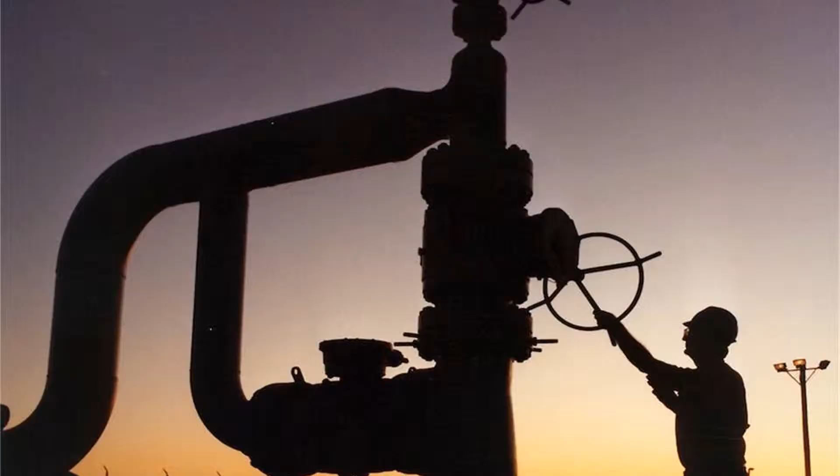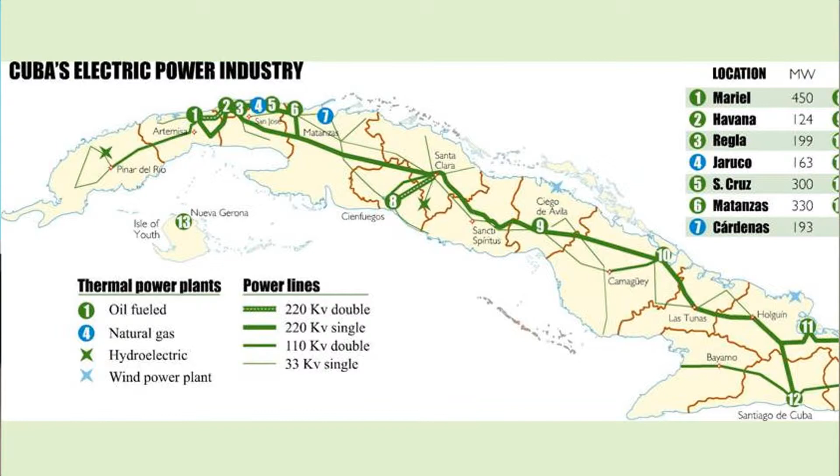In the 1970s, the national electricity system was installed, which attempted to connect the country through one large electrical grid. However, it's a very centralized system, as you can tell from the image. Most of the power plants are located in one area, and if one of them fails, the rest of the country is prone to blackouts.

Also, the transmission grid suffers a lot of energy loss because of the old technology and poor design involved in building it. It also loses energy in long power transfers and illegal connections to the grid.

In the 21st century, there are frequent power plant failures, especially during peak demand periods. This spurred the Cuban government to introduce the energy revolution, which emphasized energy conservation and promoted alternative energy resources for the country. Part of the energy revolution involved installing several thousand small generators throughout the country, and small fuel oil plants to help distribute and decentralize the energy.

Currently, Cuba has 40.5% of its energy distributed, which helps it better handle interrupted transmission. The energy revolution also replaced all the inefficient appliances in houses and altered the residential electrical rates to encourage conservation.

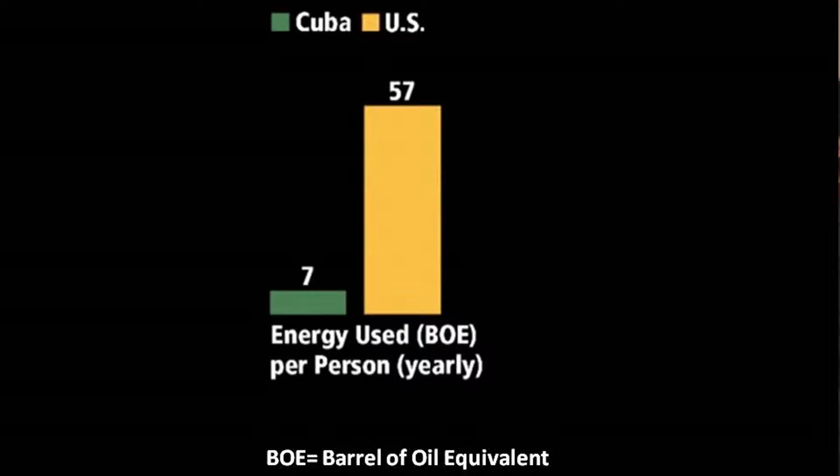However, as you can see from this graph, Cubans are already very conservative with their energy. The per capita energy use is much lower than the US. So the issue isn't with further conserving energy, but with actually implementing a stable domestic energy resource. We're proposing an alternative energy plan that's focused on such distributed generation.

We looked at four primary energy sources, and we used decision matrices to standardize our thought process and funnel our options down to find the most suitable fit for Cuba: hydropower, solar energy, wind energy, and biochemical energy.

Hydropower has the strongest foundation in Cuba, it's their oldest alternative energy source. The usable potential in the country is relatively low, although there is a potential for 650 megawatts of hydropower energy. Most of the potential has already been utilized, or the remaining areas are naturally sensitive and environmentally protected. So with hydropower, we're basically already taking full advantage of those sources.

Cuba also has experience in biochemical energy. They have traditionally converted sugarcane residues into thermal energy, known as bagasse. But this form of energy is very dependent on agricultural output, so it's not very stable, and its role as a domestic energy source has declined since the 1990s when the economic crisis hit.

The amount of land that could be used for cultivation has decreased greatly from 20% to barely 5%, so it's very limited for expansion.

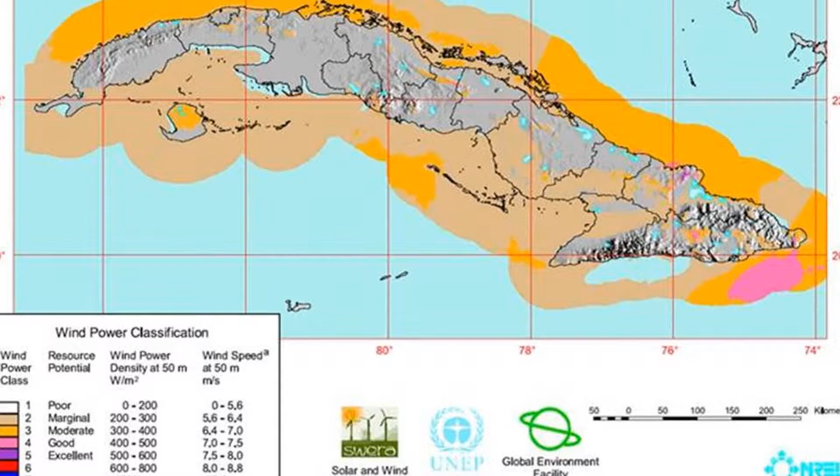From the history and research we did on Cuba's current infrastructure, we learned about 3 main criteria we can use in our design. We learned that a decentralized approach works well—it helps prevent mass failures and distributes the power throughout Cuba.

We also learned that reducing intermittency is very important, especially for alternative energy sources such as solar and wind. Those sources tend to be inconsistent—the sun isn't always out, the wind isn't always blowing—and we need to figure out a way to solve that before Cuba could depend on it to a greater extent.

The third thing we learned was that there's an abundance of untapped wind energy. Cuba has just recently invested in wind energy and received promising returns, however it still doesn't make up a large majority of their total energy production.

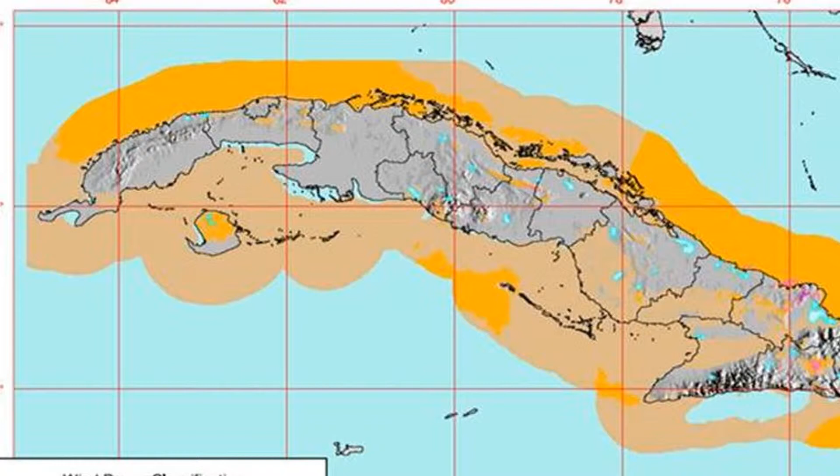As you can see in this map, Isla Juventud has a very good source of moderate winds on land and would make for an excellent pilot program for any introduction of new wind energy, for testing and prototyping in Cuba.

Denmark serves as a good example for wind energy because, of all countries, they have one of the highest percentages of dependence on wind energy. They are currently producing 28.2% of their total generation from wind energy.

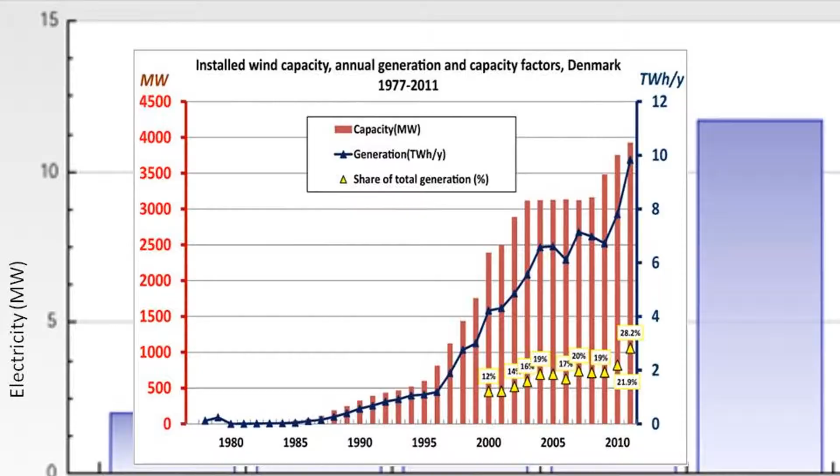However, they're having similar problems that the rest of the world is having with wind energy—it's very intermittent, it's not consistent, and you can't rely on it. They report a capacity of this many megawatts, yet their actual generation throughout the year is this blue line, which falls well below their installed capacity, mostly due to that intermittency.

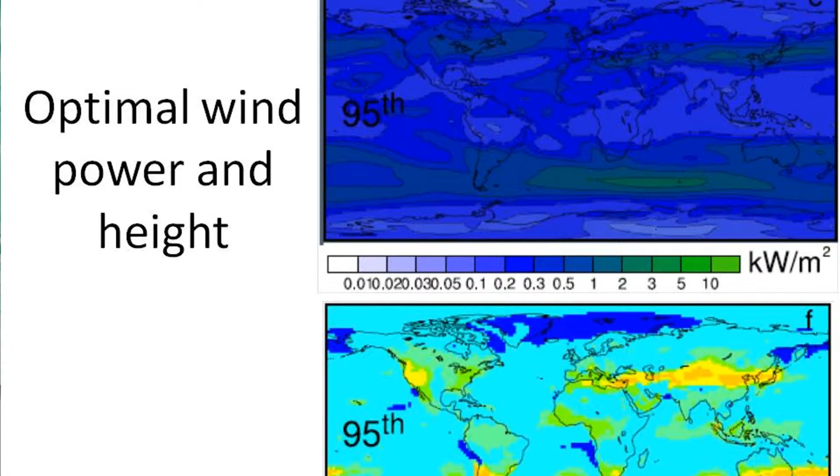Ways we could solve this intermittency issue: we can take advantage of optimal wind power and height. These maps are satellite images analyzing the best locations for having 95% consistency of reaching around 0.2 kilowatts per square meter around Cuba. This map also shows the optimal height, and around Cuba it's blue, which is 1 kilometer—the optimal height for wind energy. Reaching that is very difficult to do with traditional wind turbines because they're limited to their central post.

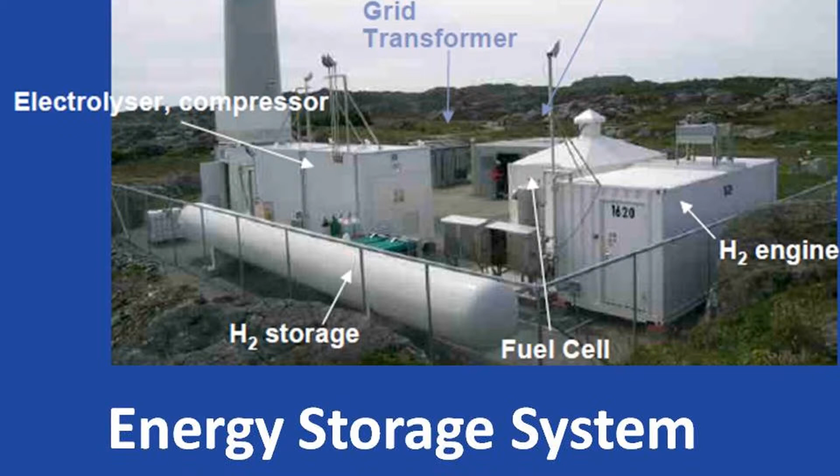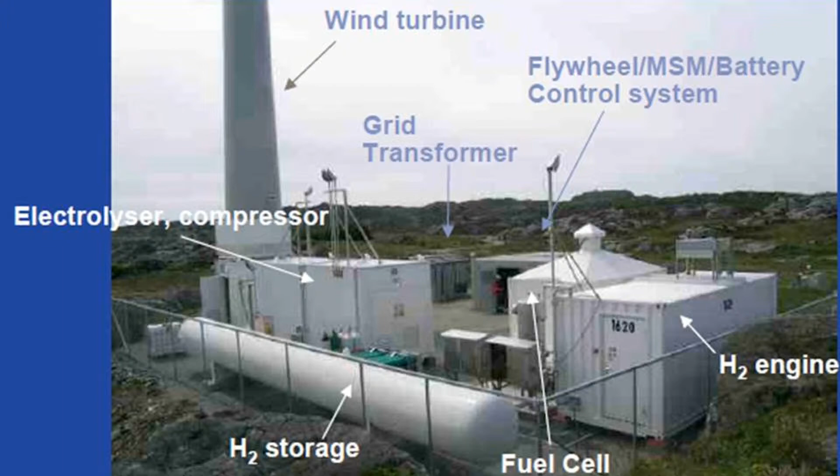Another way to solve the intermittency issue is having an energy storage system. Whenever you're producing surplus amounts of energy, you can store that surplus instead of selling it to another nation or just not using it, and it averages out your energy gathering throughout the day and throughout the year.

This storage system specifically is hydrogen storage. It works by using an electrolyzer, which splits the hydrogen and oxygen atoms of water using surplus electricity generated from wind turbines. This is actually an example from a project in Utsira, Norway, where the whole island is completely dependent on wind energy and storage into hydrogen.

That system will be combined with a new form of wind turbine called the Aerostat wind turbine. This wind turbine is very adaptable—it can be deflated and is portable, so it can be moved around throughout Cuba. Whenever there's a hurricane or any similar issue, it can be put away and protected, so they don't have to over-engineer their wind turbines to withstand those types of forces.

It's a floating wind turbine, so it depends on some type of lifting gas, typically helium. However, 75% of the world's helium comes from the US, and that really limits Cuba. So our way around that is to use hydrogen, supplied from the hydrogen that we produce in our hydrogen energy storage system. They couple very well.

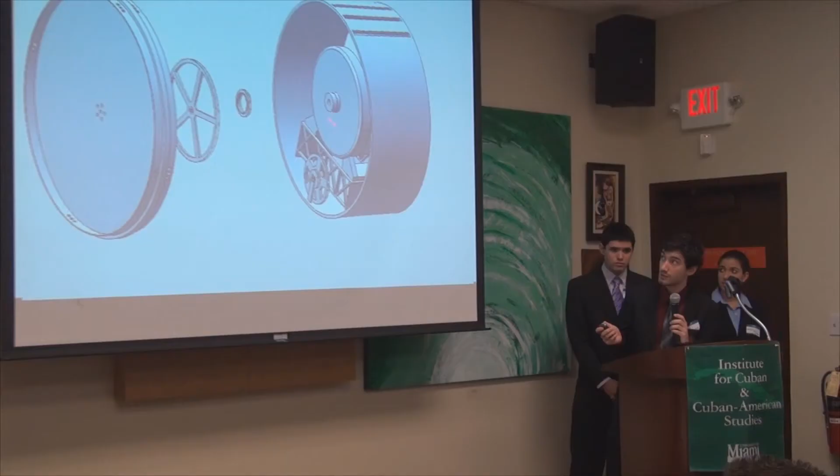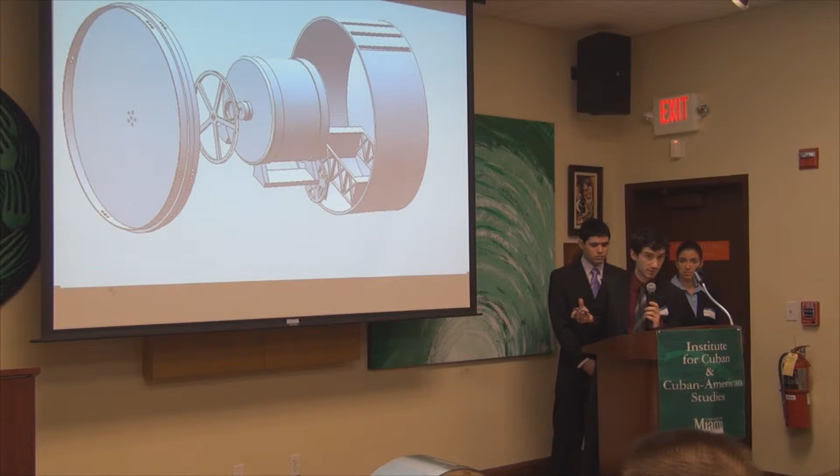We have vents on top to relieve any heat created from the generator, and we isolated all the components within the generator from the blimp so that if any hydrogen leaks were to occur, they would not have contact with the generator, eliminating most possibilities of sparks transmitting and causing a failure.

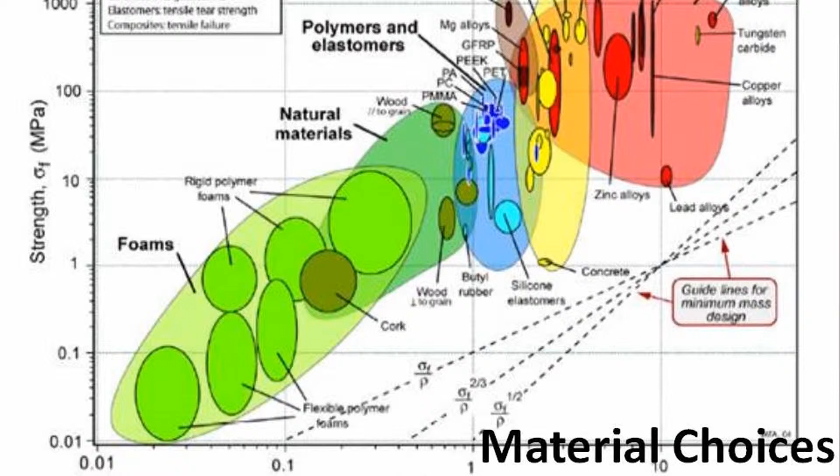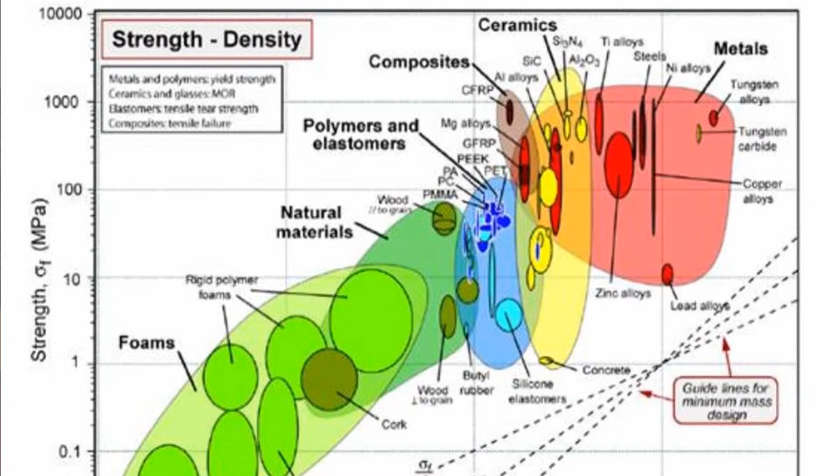This graph is a very complicated Ashby plot, but we used this to figure out what materials we wanted to choose for the skin of our aerostat. We wanted the outside to be UV resistant, so we used a material called Tedlar, which is a polymer. Polymers fall within this range, which is a good balance of density to strength.

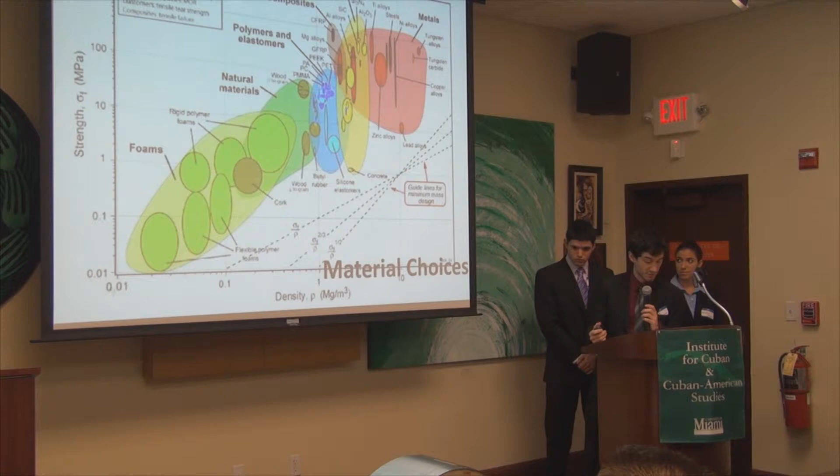We also used Mylar on the inside to reduce diffusion of the hydrogen, and it's also heat resistant in case there's any type of incendiary. Then for the middle layer, we used a tension-specific polymer to hold most of the load, known as Dacron.

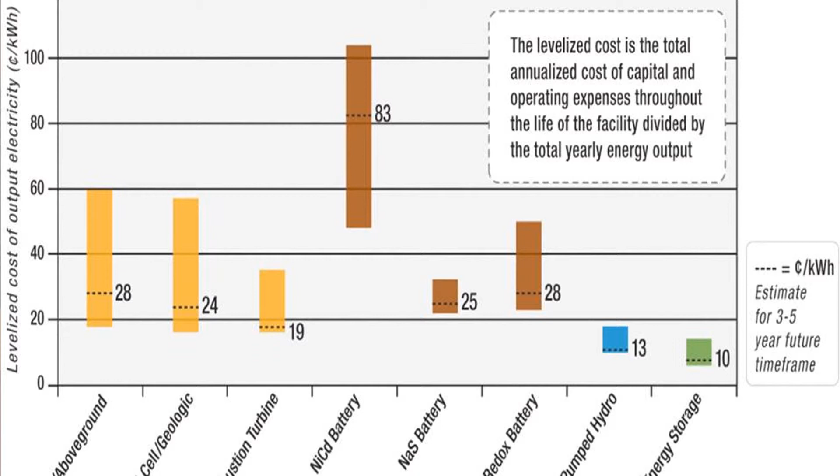Here's a cost comparison of a hydrogen storage system. What we will be using specifically is a hydrogen combustion turbine. As you can see, it has an average cost of 19, levelized cost per kilowatt hour. This is estimated for a 3 to 5 year future time frame, and it compares very well to other forms of energy storage, such as batteries. Batteries tend to be a lot more expensive, however they do have the benefit of higher efficiencies.

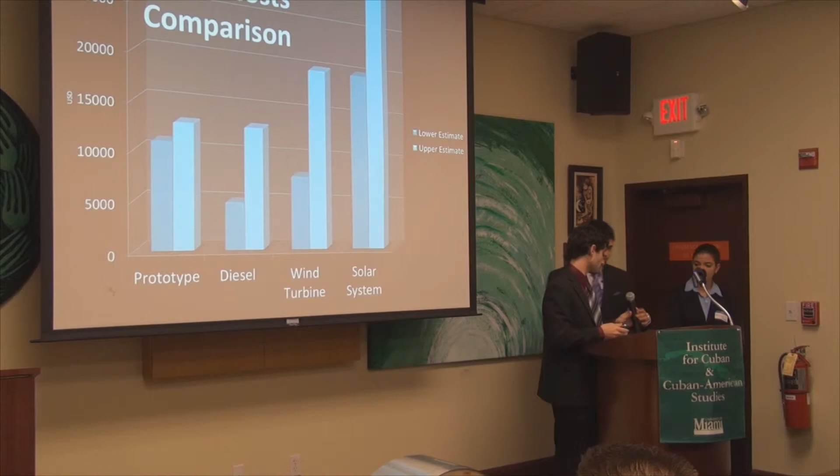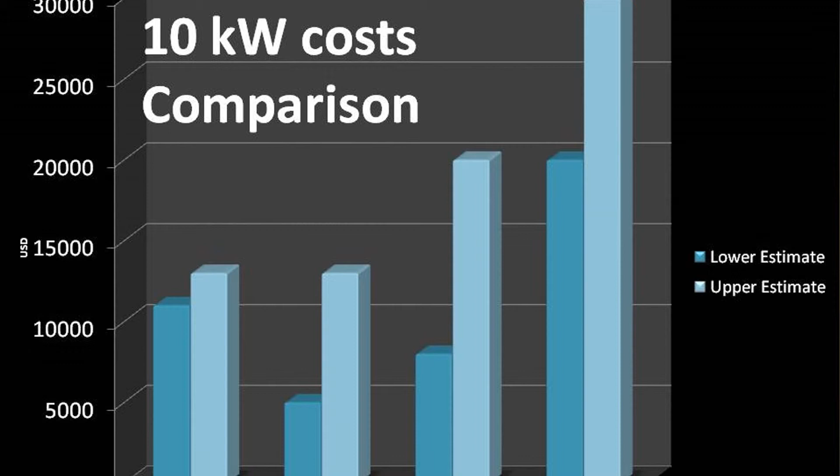This is a cost analysis of our design compared to other 10 kilowatt alternative energy sources. As you can tell, our prototype ranges between $11,000 and $13,000 US, which is pretty good compared to other traditional alternative energy sources. Since Cuba's main problem was financial stability and initial cost, I think this is pretty good.

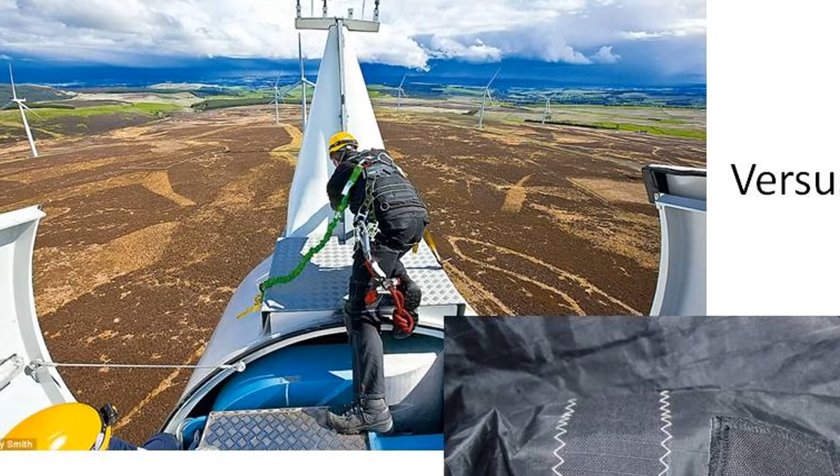Another problem that traditional wind turbines have is maintenance cost. Traditional wind turbines are higher than 50 feet, so you need really specialized people to work on them when something breaks. Another issue is that these wind turbines are not mobile, so if there's a lightning storm or thunderstorm, damage can be caused to these massive and expensive blades. Whenever something happens to these blades, they're really expensive and hard to replace.

The way we combat this with our prototype is by having it be able to descend. So whenever something happens to our prototype and it requires repair, the maintenance cost is relatively cheaper, since we could just descend it and patch it up.

A problem that most wind turbines have is that it's kind of like a Pandora's box. It looks great at first, but then a lot of problems arise. One of these is many deaths of flying creatures, such as birds. The blades might not look like they're spinning fast at the center, but the tip of the blades actually goes really fast, and birds can't see these blades rotating. So they get hit, with estimated fatalities between 10,000 to 40,000 birds and bats.

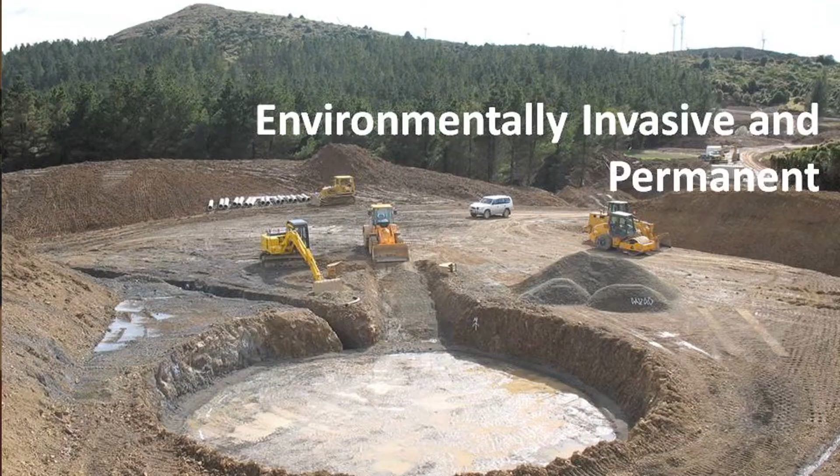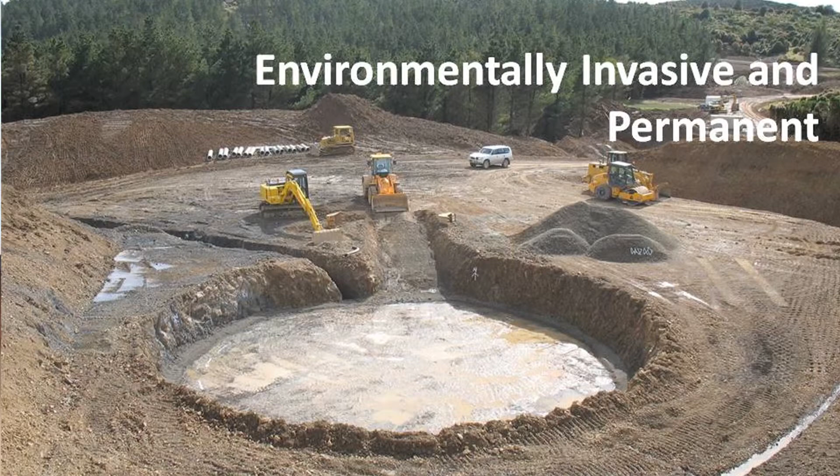Another problem with traditional wind turbines is that you need a really large base to hold the massive center pole and the blades on top. These bases are permanent, so once you modify the landscape for it, it's stuck and you can't do anything with it. Since our prototype doesn't need a base—just a place to attach to—this wouldn't be a problem, which is very eco-friendly. Another issue is that the base is filled with concrete, which releases a lot of emissions.

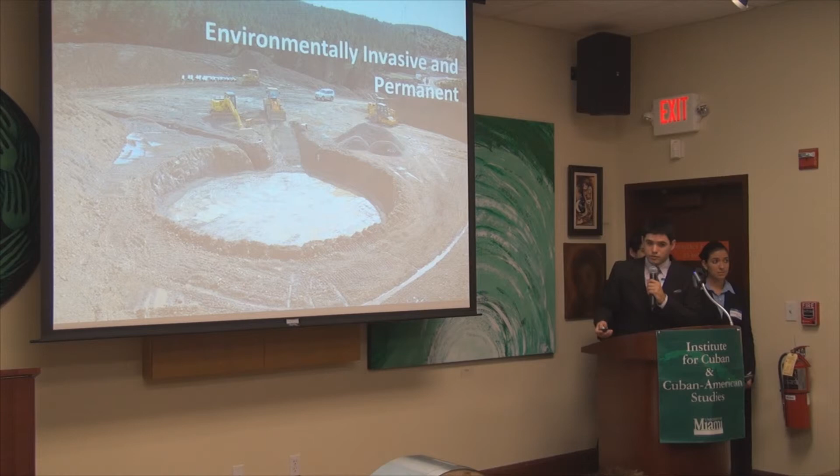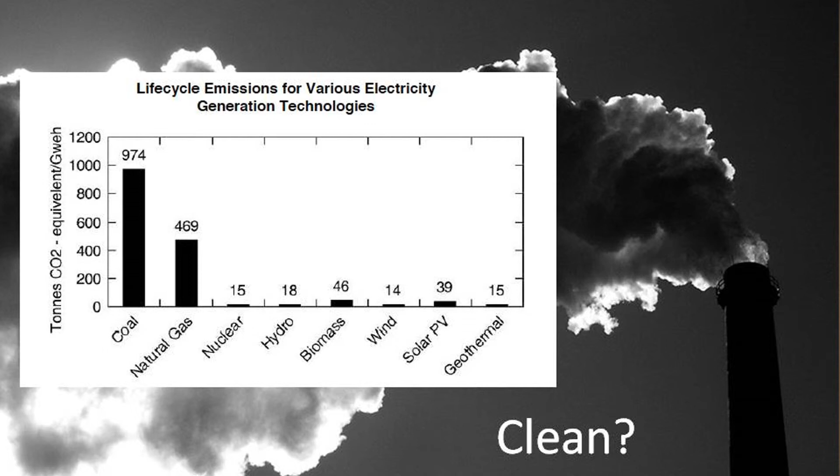As we can see from this chart, wind energy actually releases the least emissions out of all energy sources, which makes it very eco-friendly.

A lot of people have this notion of the Hindenburg incident, and whenever we say our blimp will be filled with hydrogen, this is the first thing that comes to mind. What actually happened with the Hindenburg was that the coat of paint used on the exterior was flammable, so when a spark happened, the flammable oxide encouraged the fire to spread.

This brings us to emissions. Emissions from our blimp would just be hydrogen, which is not bad for the atmosphere and won't cause any sort of problem.

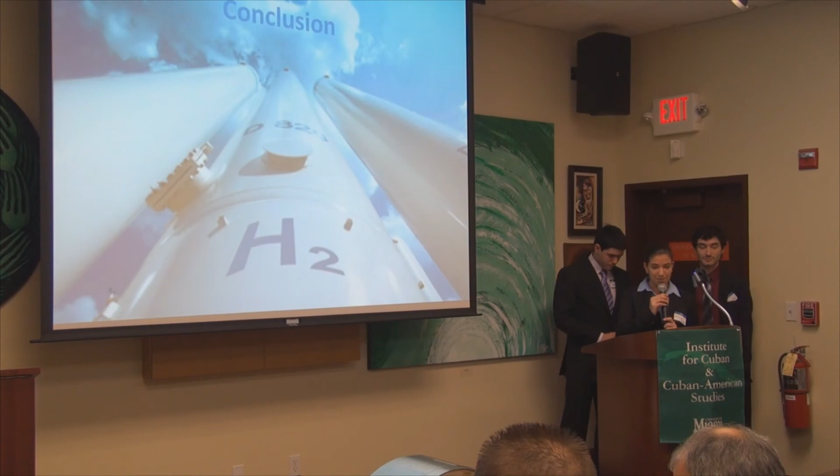In conclusion, we propose the flying wind turbine as a cost-efficient and reliable form of distributed energy and storage. We expect a lot of future improvements as time goes on in both the function and reliability of the design. We also want to point out that Cuba's energy problem cannot be resolved with just one or two resources, but through a carefully designed combination of several, and our proposal presents what we believe to be one integral part of such a combination. There are also possible ramifications for a hydrogen economy—surplus hydrogen produced can be traded to other countries or used in other parts of the infrastructure, such as transportation in Cuba, providing a lot of opportunity for Cuba's energy infrastructure.